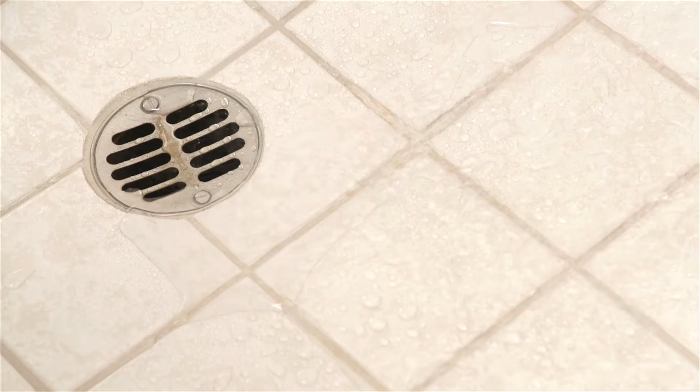In the city of Redding, we don't worry about the quality of water that's sent to our homes from the Sacramento River. But do we ever stop to think about the impact we make on that same river after water leaves our home?

We're all guilty of occasionally putting the wrong things down the drain, whether we know it or not. And when enough of these wrong items get into the sewer lines, they not only clog our drains and hurt our river, but they can also increase your bill or force you to call a plumber.

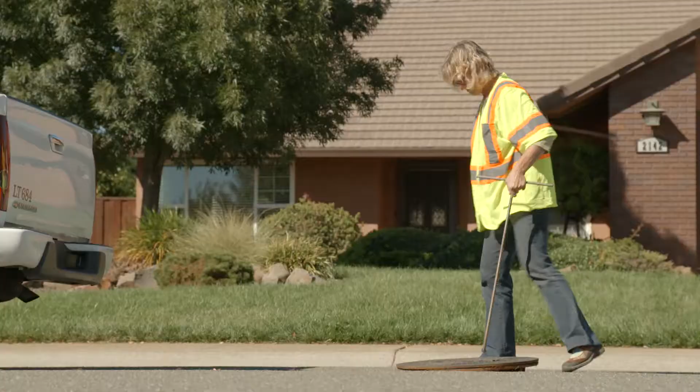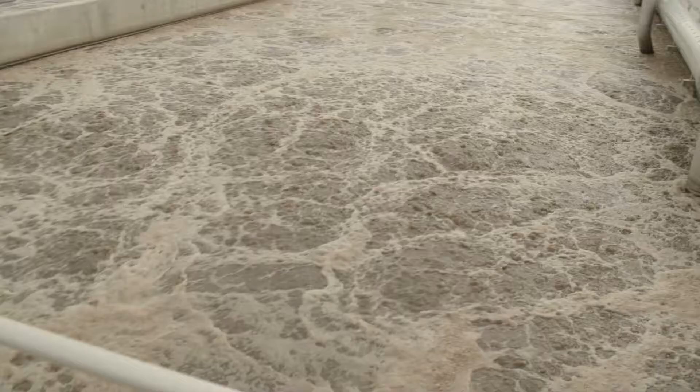There's two ways water leaves our homes: through storm drains and sanitary sewers. Storm drains and sanitary sewers are completely separate pipe systems. Sanitary sewers go through a fairly elaborate treatment process before the water's returned to the river. Storm drains, on the other hand, go through no treatment at all.

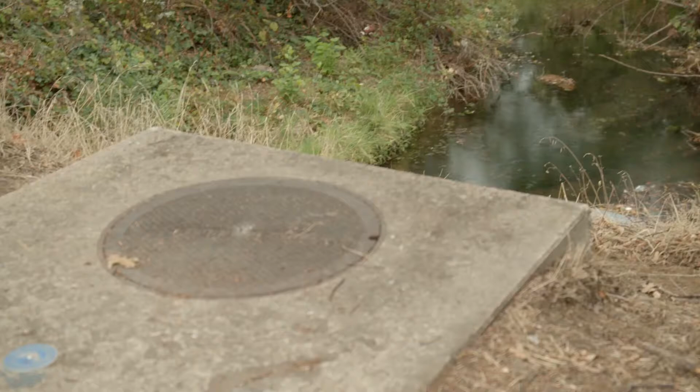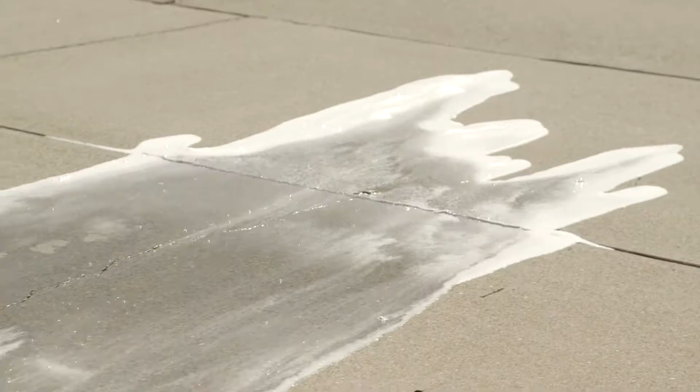Everything that lands on the street or in parking lots or in drainage ditches flows directly to the Sacramento River with no treatment whatsoever. If you wash your car, that soap is running from your driveway, down the gutter, right into the storm drain. From there, it goes to the river. You might as well just pour it right out into the river.

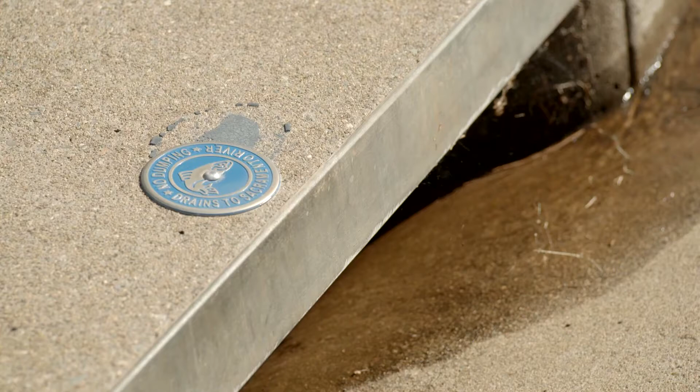But what they might see more than anything is the trash. The litter and the trash that people might inadvertently throw out their window, that cigarette butt that goes out the window, it is all going to end on the street and it will all be washed into this river. And as the waters come, it's just going to continue to take it further and further down and then ends up in the ocean.

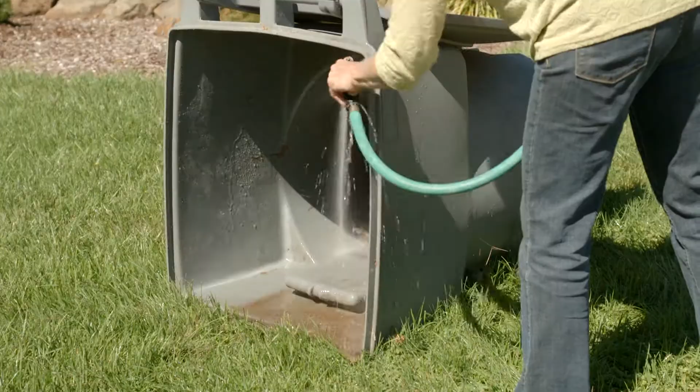What's the proper way of maintaining our storm drains? It's okay to fertilize your lawn, just don't overwater afterwards or fertilize before it rains. Also, wash your car or any other item that may harm our river over grass or gravel.

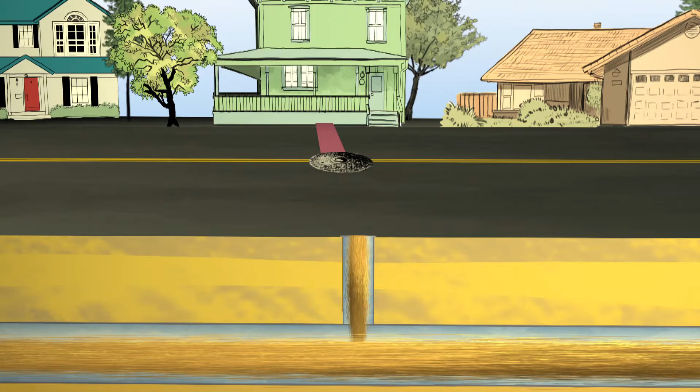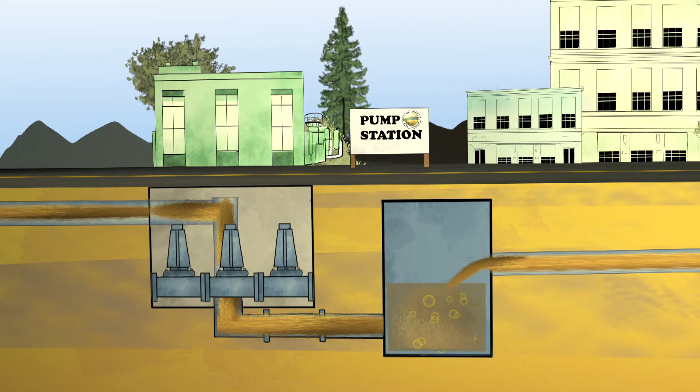Where does the water go inside our homes? In Redding, wastewater that goes down our drain flows through a main drain pipe called a lateral. This pipe meets up with the city sewer in our streets. The wastewater flows from gravity until we need a pump station to help lift the water up to a higher elevation. This allows the wastewater to continue to flow again until it gets to the wastewater treatment plant.

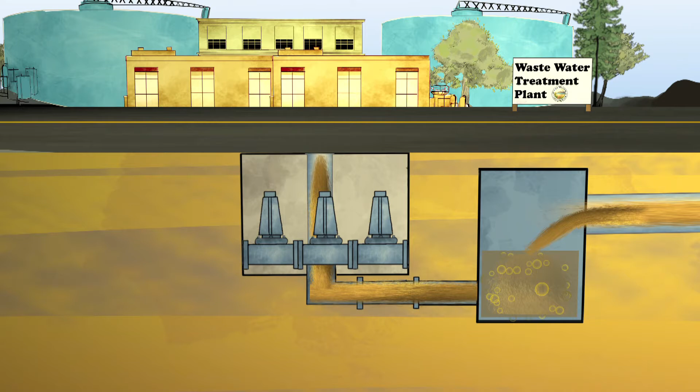With this big system in place, why does my drain sometimes clog? People have an idea that there's Teenage Mutant Ninja Turtles running down these big pipes through the city. It doesn't work that way. Usually coming from a house, you've got 3 to 4 inch pipes, so they're small in diameter. So there's your first problem there. The smallest pipe in the system is your own personal pipe.

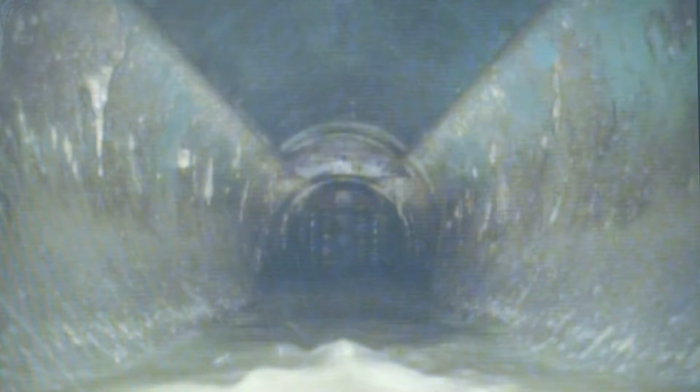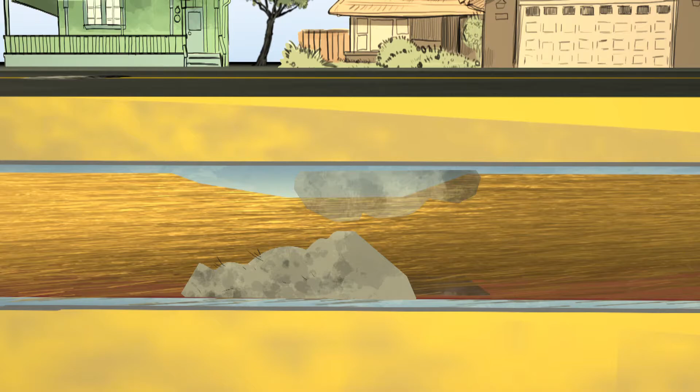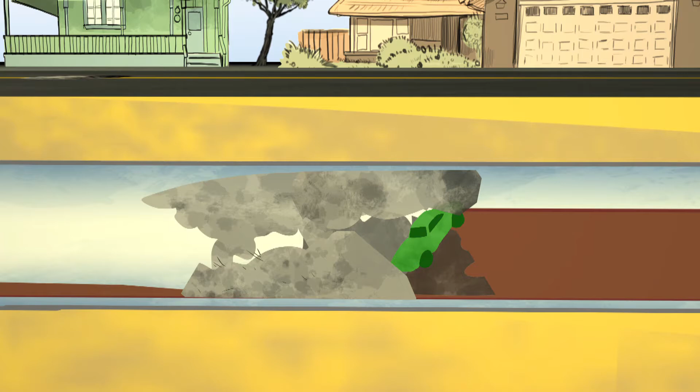Grease can't go down the drain because it sticks to the pipes, so it basically shrinks it, much like your artery gets constricted when you've been eating greasy food. And it reduces the amount of water that can flow through. So now here comes a wipe or a matchbox car that your kid flushed down there, and it hits that smaller section of pipe. It gets lodged in there. Now it blocks up the pipe, and so that's why you end up calling the plumber to come out and try and snake your drains out.

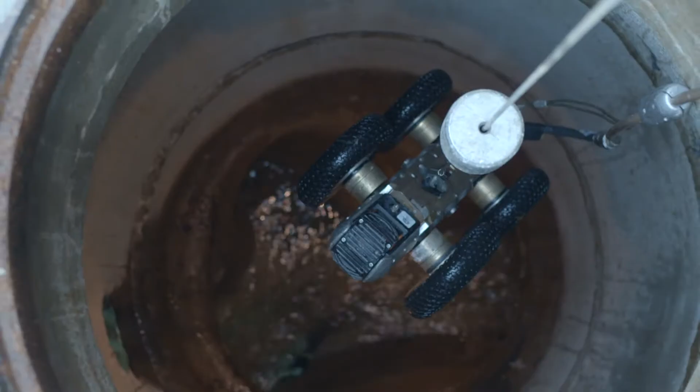We have to do the same thing, except our pipes in the city start at 6 inch and they go all the way up to 48 inch. We view the sewer lines throughout the city, and we look for obstructions that could cause problems in the city sewer lines. For the most part, they're grease, rags, baby wipes, roots from trees.

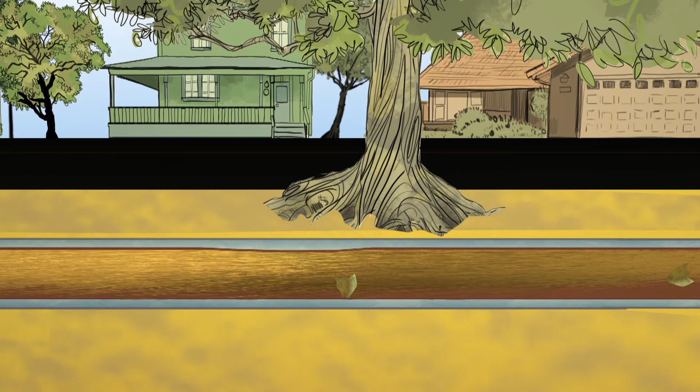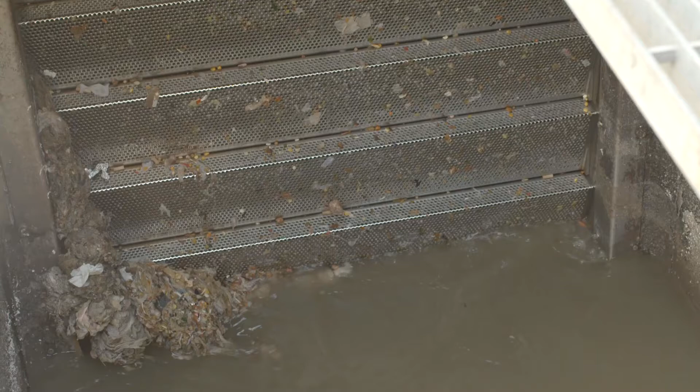The roots can get very aggressive and they gather nutrients from that sewer water, and so they'll start to grow down the lines and cause stoppages. The flushable wipes—normal toilet paper breaks down in about 8 seconds, and the wipes, they can put it in water and they'll still be resilient after 30 minutes. So what happens is you get multiple wipes, they clog together, they form a ball, and then they jam up these pumps. Some residents in Redding use their toilets as a trash can.

Redding residents can help by throwing away any solid materials instead of putting them down the drain. They can collect their grease, put it in a bag, and put that in the trash as well. Household hazardous waste materials should be taken to the household hazardous waste collection facility.

Also, be careful what you plant near your pipes. Watch out for plants that have aggressive root systems.

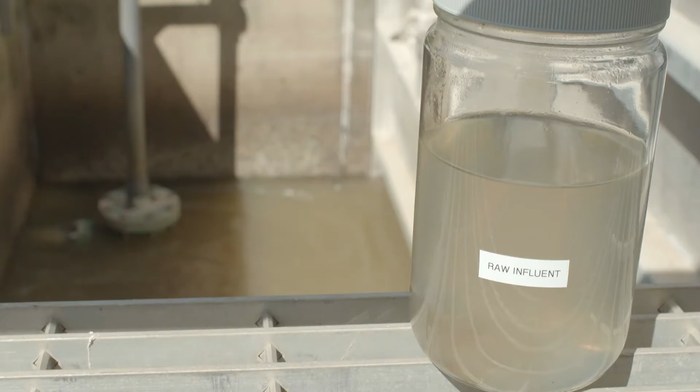The wastewater flows through the sewer lines until it reaches one of two wastewater treatment plants. The city treats up to 40 million gallons of water per day at their plants. When the wastewater arrives here at the plant, it comes through a collection system to a low point within our plant. The raw sewage that comes in, we pump it up to our headworks, where screening takes place, where there's removal of rags and plastics and anything that's solid.

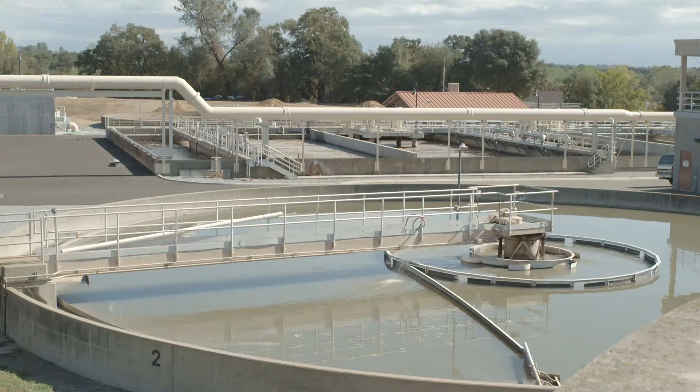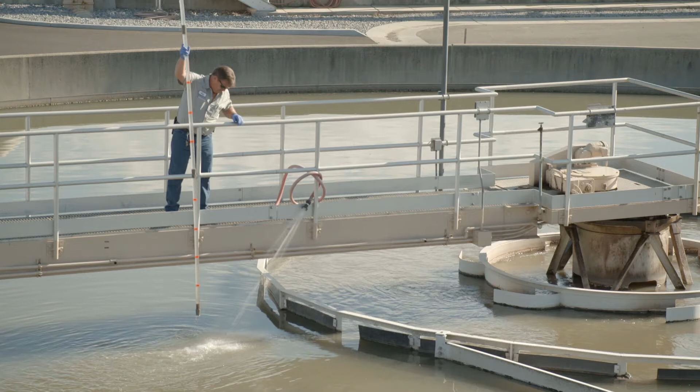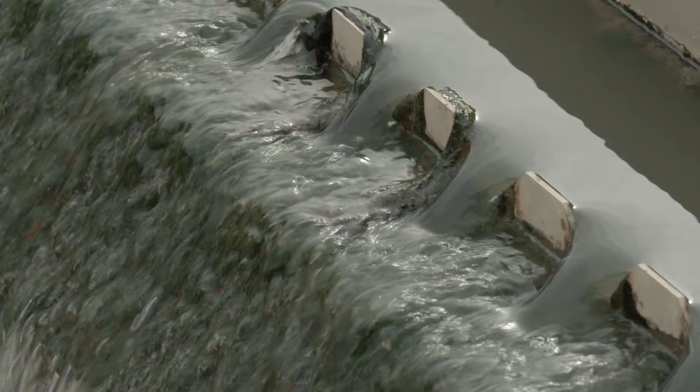From there, the flow stream continues to something called a primary clarifier. In that clarifier, the raw sewage is coming in, and the heavy items physically, gravity-wise, fall to the bottom. The other part of what's happening is a separation of the flow stream, the part that's going over the top of the weirs and continuing on through the rest of the plant.

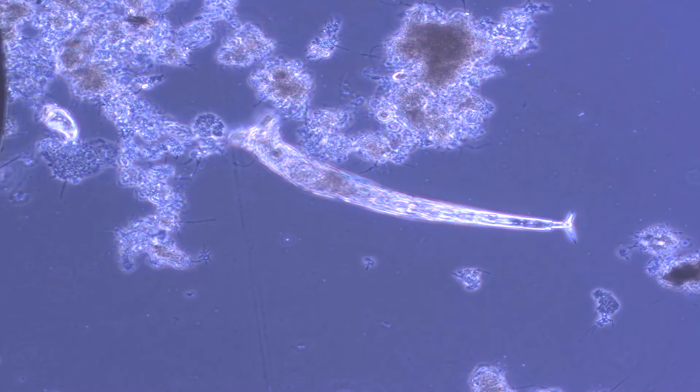That flow stream goes over to the aerobic aeration basins, which you can also see in the distance over my left shoulder. We're putting air into the bottom of that basin, and there's aerobic bacteria and microorganisms that are really doing the work for us. They're removing ammonia and ammonium, changing it into nitrites and nitrates. Eventually, ammonia—a very dangerous pollutant to fish—is converted to nitrogen gas, which goes off into the air. That nitrogen gas is harmless, which is pretty awesome.

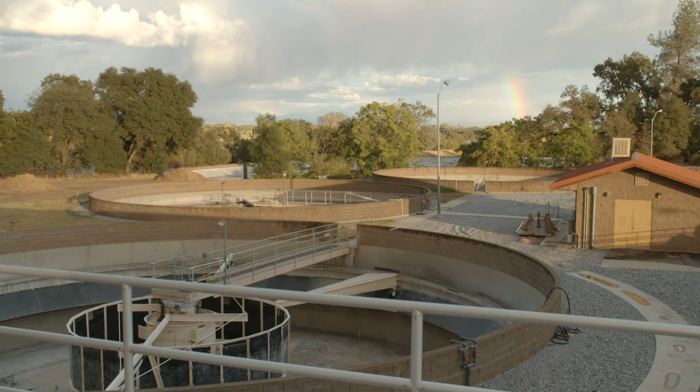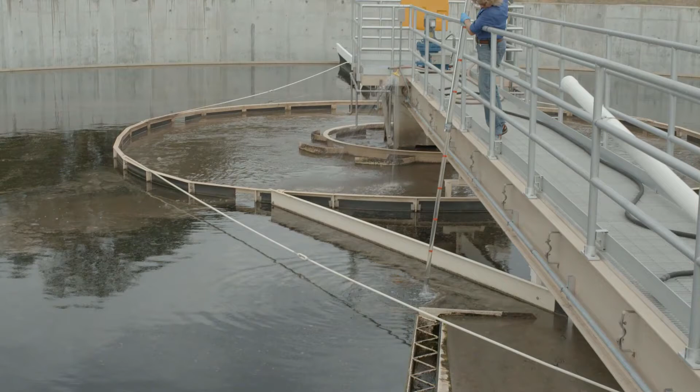Then, out of that aeration basin on the other side, we have four secondary clarifiers, and those clarifiers are also settling tanks. The solids settle to the bottom just like they did in the primary clarifier. At that point, the water that comes off the secondary clarifier goes down over the hill by the river to our chlorine contact chamber and our filters.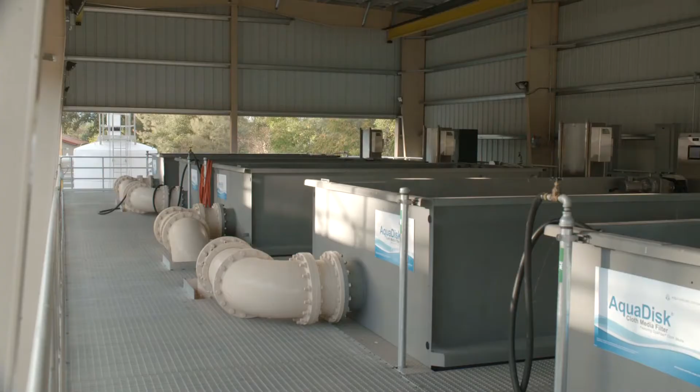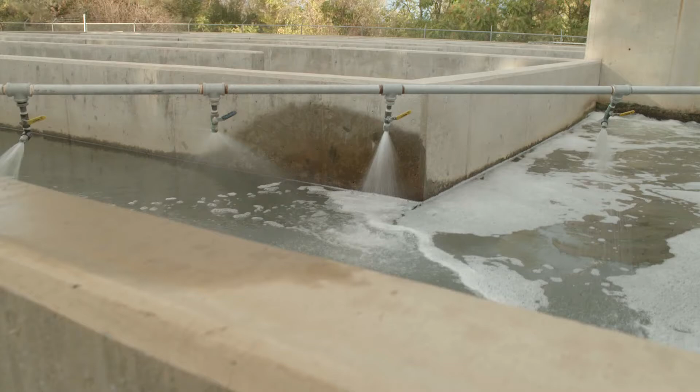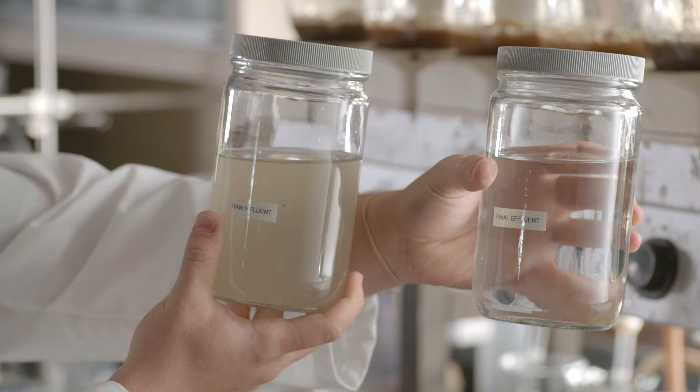We have cloth filters and sand filters down there. The water's filtered first, then it goes into our chlorine contact chamber where it's dosed with chlorine to kill the remaining bacteria. At this point, the water looks very clear, much like the water that comes out of your tap. Then it goes down a long pipeline out to our outfall, where it's dechlorinated, and then it goes into the river.

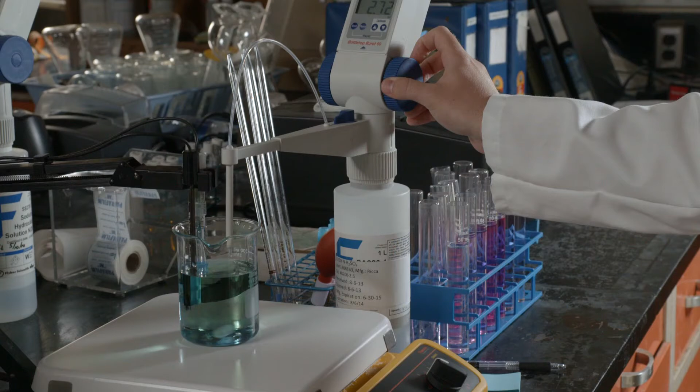It's important to treat wastewater because we as a society want to maintain a clean environment. Through the wastewater treatment plant process, we're able to return water to the river approximately as clean as it was when we took it out of the Sacramento River 10 miles upstream. It's something that's everywhere—this is a global field, a global issue. As long as there are people, there will be human waste and a need to manage it.

If you flip on your light switch, the lights come on. If you turn on your faucet, water comes out. You flush the toilet, and it just disappears and goes away. But there's a whole network of processes, pipes, and people that have to take care of all this stuff and keep it going. We have a limited staff here, and we really appreciate whatever you can do to help minimize these problems for us.

As a city, we're all in this together. If the sewer line doesn't drain for your house, it doesn't drain for your neighbor's house, and so on down the line. So we all have to work together. Your water, wastewater, and storm drain infrastructure not only belongs to the city of Redding, but to everyone in the community, and it's everyone's responsibility to take care of it.